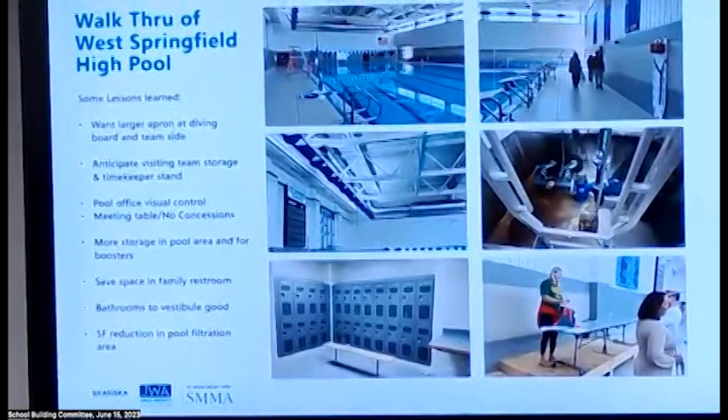So we wanted to respond to some of those things that came through the walkthrough. Specifically, I wanted to show you that we had adjusted the plans based on the site constraints we were talking about last time, as well as some of these commentary items. So what would a larger apron of the diving board and team side look like?

The team side was in order to add an additional seating line for visiting team swimmers, as well as to anticipate the storage and timekeeper stand. The initial storage could be dealt with a few different ways, but we're trying to show a little bit of extra storage, and we keep the timekeeper stand in our goals.

And then what was helpful for us is to understand how critical the pool office's surveilling position is. You can't mess with that. It's got to be able to see the vestibule, see the pool area, and also observe, at least by sound, people coming through from the locker rooms.

There was noted lack of storage for equipment to come out into the pool area, as well as that question about storage, how we would deal with boosters. So it was agreed that we didn't want a full concessions window, but we would want to allow a booster group to put a table out. So maybe that's just about having sufficient space in the storage room for a table that could be pulled out.

There was agreement that the family restroom, which was quite sort of double the capacity you would absolutely need, might have had extra space that we could pull back a little bit in order to make up for it elsewhere. So that's something to look at.

We talked about the vestibule bathroom relationship being important, because in our scheme, it's actually relating to the high school again. So we've tried to show that.

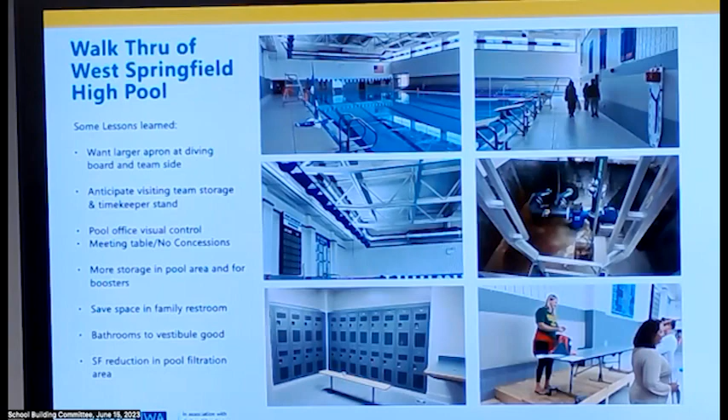And then one question that we're going to talk about today is the square footage for the mechanical systems. There's some choices that could help us squeeze down the mechanical space slightly based on the filtration choices. Mike is going to join us at 3:30, and we've got some slides so he can ask you some questions that will help him develop his specifications that we'll then respond to in the plan.

So, next slide. Again, remember last time we were showing these three potential physical orientations. So we worked with the site team to explore this further.

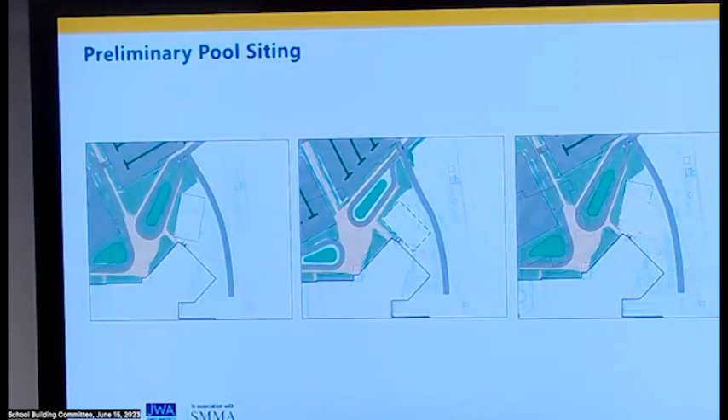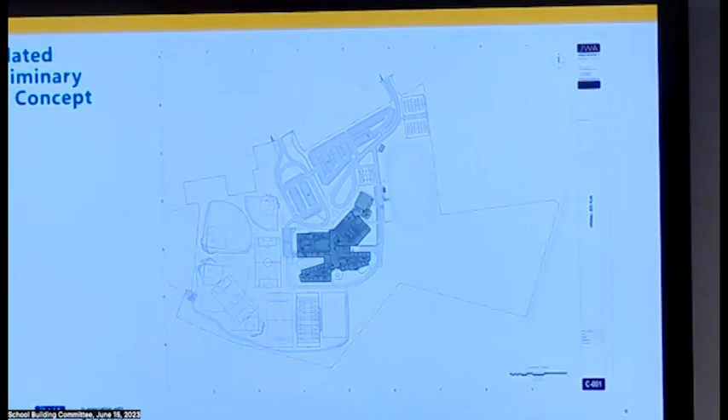And in the next slide, you see where we are currently. So what we ended up doing, and the plan you'll see close up in a second, but in the overall view, we found that if we took it apart there's three programs—there's a pool, there's four programs.

There's the pool, there's the mechanical spaces that support the pool, there's the locker rooms as a component, and then there's those things that you have to pass through, the pool office and those pieces. So rather than have it all as a bar, we actually tried to kind of break it apart a little bit to see if we could make it fit what feels like a really important geometry.

That we're trying to hit here, where the front of the school is not over—the hierarchy. You don't want to have the pool sticking out in front of the school. You want it to kind of feel like the school is the most important element.

But we also have this point that we have parking behind the pool building, and we have this concern that we have people coming from both the backside, potentially from parking, or from the front loop. So we have a double, a vestibule that has to be accessed from both sides.

And then we have the basketball courts. So how do we kind of fit these together? This is our current situation that makes the best use of the site, and we think it answers a lot of those questions. So if you could click forward.

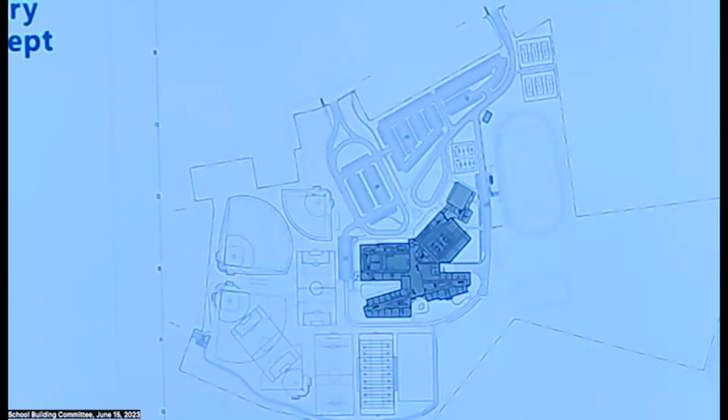So this is a blow-up of what you're seeing there. Not everything is perfected, I think—we would have a strong core, and a really important question that the next committee has to collectively answer is whether this vestibule and the bathrooms, in this configuration, we're assuming they're part of the pool.

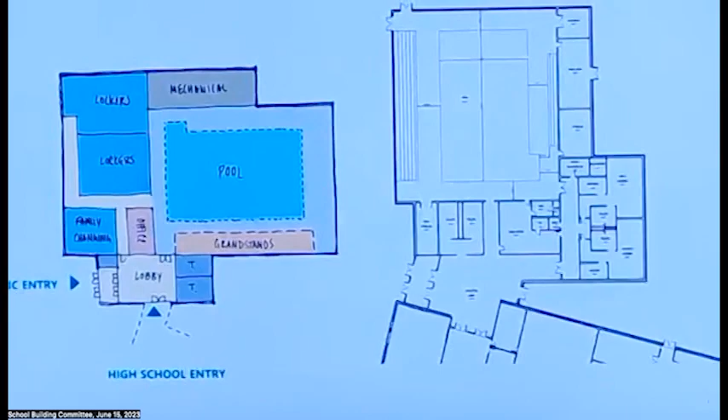So that increases the pool square footage as a building. In order to have that not be added here, because the vestibule is adding obviously a lot of square footage, especially since a vestibule has to be accessed from two different sides.

And it's kind of nice to have this big, generous footprint because it's essentially the overflow from the gym. So if you have 500 to 800 people in a gym, you have the ability for comfortable access from the front of the building in. If you have a bunch of people—parents there for the pool—you have essentially this room between the two that does double duty. So this is showing a very generous lobby, obviously.

And there's mechanical systems to support that, obviously. So it's an expensive piece that in a way wasn't in our minds when we were thinking about the school. So we put it with the pool. That increases the pool area to the combination of these two.

So that puts us up at 17.9—more square footage. What was it before? Well, we had 16, that was about where we were. 15 is the number we had talked about originally, way back before. We were at 16 last time. Again, we haven't gotten into the cost per square foot, but we had a rule there that we were kind of roughing out.

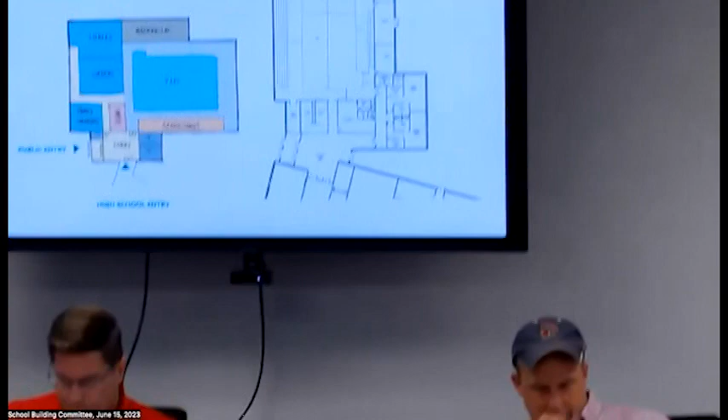Yeah, but we're adding 10% square footage—does that add 10% cost? Exactly, it's directly relative. Right, that's what we're doing. So that's the question we're looking at.

But this is where, looking at it, here you can see a little bit more close up.

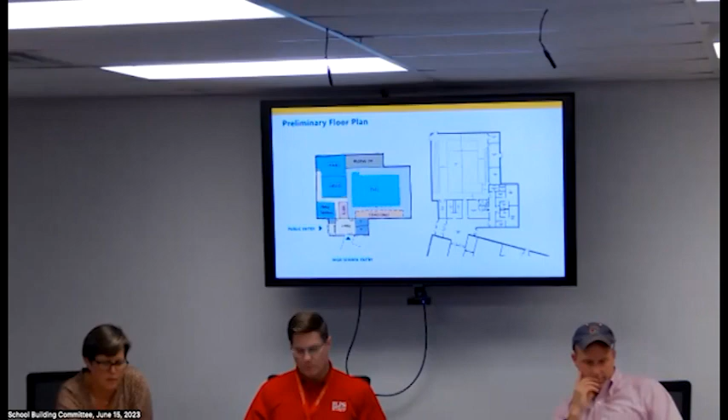What we're talking about is this rearrangement. So we have the pool mechanical room parallel with the deep end of the pool. We're not showing the diving board, but we have a 10-foot apron to the back. 10-foot up front could be bigger than we need, so that's an area where we could go a little tighter, maybe, depending on the flow and preferences.

That's the deep end, Dory. The south end is the deep end. That would be the north end technically, right? North is the deep end, yeah. The top plumbing room is east. Oh, northeast, yeah, north. Let's say plan north.

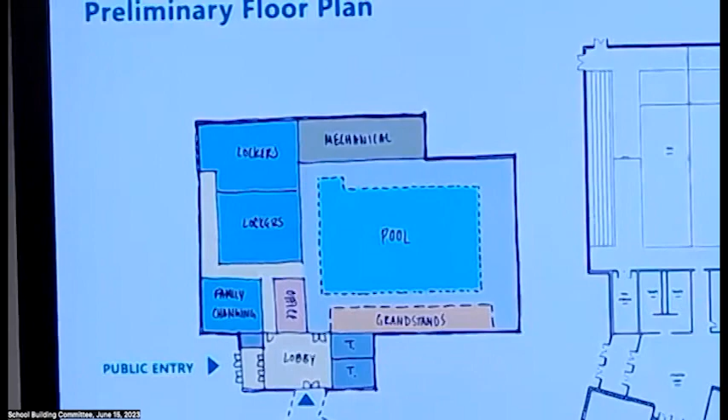Forgive me for asking this because I wasn't at the last meeting - so there's not going to be a basement under this? Correct. Good. But the deep end is as deep as it goes, that's what it sounds like, yeah.

And this is pretty straightforward, right? We did look at whether there's a way to connect a second story, and it just was going to blow it up. So it seemed like the important thing was to address the really functional issues that were raised.

So just looking at it, Dory, the main entrance - I think it should be to the far left, not directly at the end of the pool. Two reasons: that's where the starting blocks will be, or no, the blocks will be at the other end. But there's traffic, foot traffic, and dirty shoes.

So I think that should be where the storage is, that main access. I know there's... all right, well, no. I think that's right, or move the toilets over. Yeah, that's what I mean. Yeah, we can move the toilets over for sure.

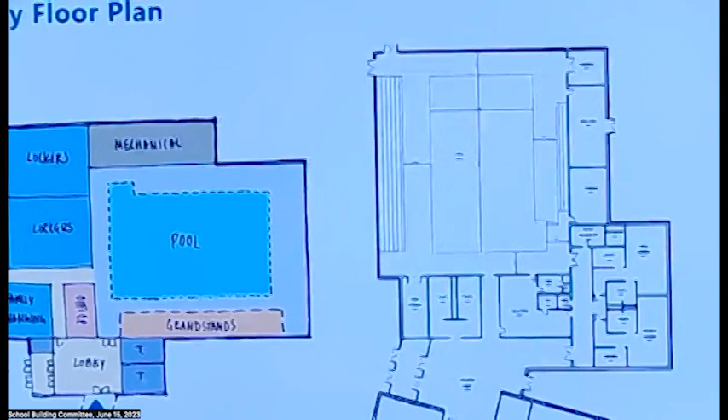If we could - I mean, part of it is that vestibule, right? You need to get through the double vestibule. Yes, we can tweak that, but I think that's really helpful commentary because we want to come in more directly. And I think that's okay.

The pool - you're thinking about sightline, right? So my assumption was that you're coming in and going by the office. Yeah, I get that. And security maybe too. Flip the office with the toilets.

Is that okay? Because again, if the office is to the left, is it okay to just have sightline of people coming out of the locker room into the pool area? So you're talking about moving the pool office and the toilets in the flip-flop lane.

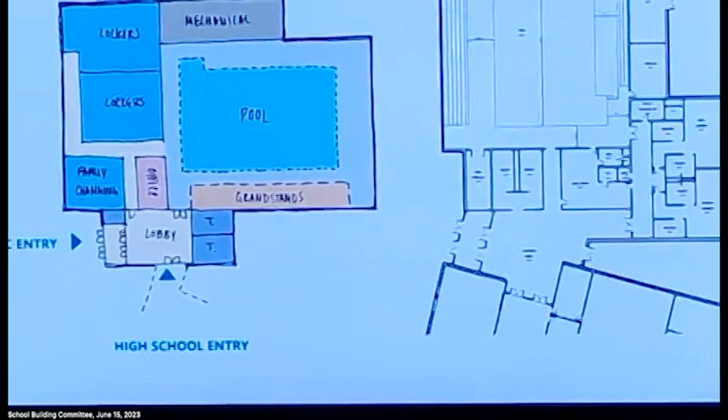Yeah, I think that was fine as long as the pool office opens up both ways. Like if I'm looking at this pool office, and if we're thinking it looks similar a little bit to the one in West Springfield where it kind of opens and closes, is that what you're talking about?

Like how they had that whole thing that opened all the way? Yeah, we're not gonna do the open front, no. We're not gonna open it, but we might have glass. We didn't want quite that big an opening though. You just want a window essentially. Well, yeah, whatever, it doesn't matter, as long as you can open to see out, that's what you're talking about.

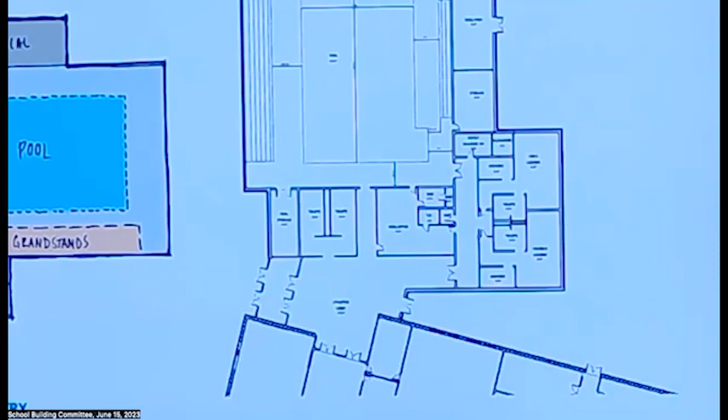As long as you can see from the pool office into the vestibule as well as passing the office. Right, as well as in. Well, so Dory, I think you make the hallway glass and the poolside glass with an opening.

Hallway side for ticket sales or something? West Springfield, they use it when they have rec meets - they open that whole thing up and use the office as their snack bar. But we're just gonna put a table in the hallway for a snack bar, so we don't need the whole garage door thing, right? But if you're gonna have people signing in and checking in, you're gonna need some way - like if they're paying or scanning - so you need a barcode or something, yeah.

Greg, what was your question about the path of travel? So the main hallway is in the middle. So when spectators are coming in out of the snow, they're gonna walk right at the end of the pool. I think it's better to put the spectators right into the stands and not across the pool deck. The swimmers are gonna be clean anyway, because they're out of the locker room.

Got it. Yeah. And just avoiding the diving blocks location. The blocks are gonna be in the deep end, right, in the other end? Right. But, and I know I said that before, but it always gets wet. Is that what you're saying? What's that? Pool storage becomes your hallway in? Well, we're gonna have a problem with that because of the double vestibule.

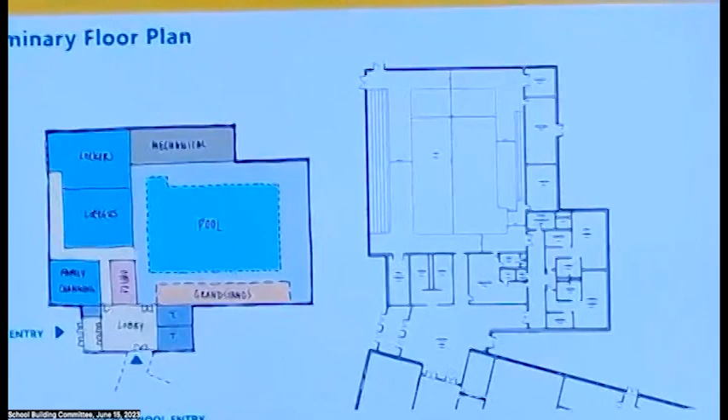I think we might be able to keep the storage and put the office next. Just not dump it right out there. I was thinking that we would have the passage, then the office, and then the toilets. So you'd still be able to get to the left side of the pool on your way in, but keep storage there, because the value of storage is that it helps our vestibule a little bit, gives us that padding.

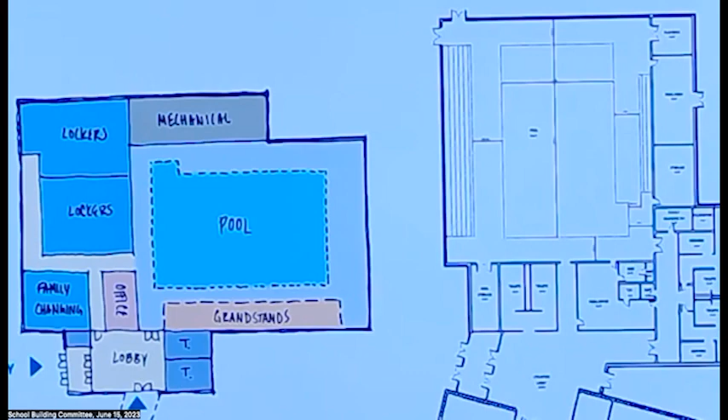Or is the size of the lobby driven by the geometry of the building and the pool building? Yeah, pretty much. In that you have to get people into the locker room. And the other thing, if I could flip back the slide here, sorry. One thing that was really bothering me before is that we had this kind of tight chute between the pool and the school. It felt awkward.

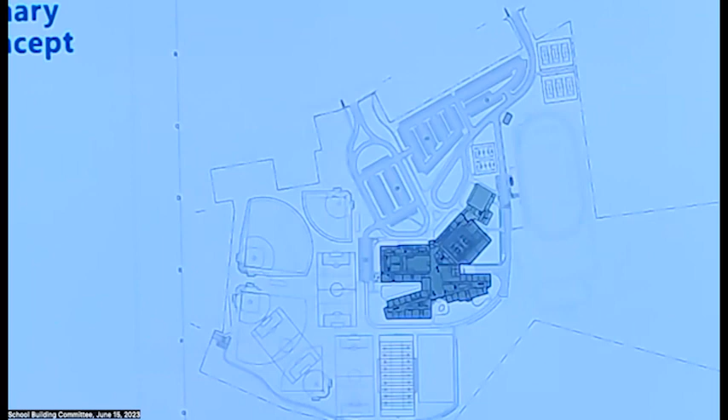Using that storage area to kind of open that opening makes it a little bit more pleasant. And also, what's nice about this is the mass of the pool becomes a big piece that you're seeing rather than the little tiny mechanical systems on top of the little tiny roof. So that'll be nicer too. Yeah. But we can work on that. I wouldn't sweat it. Keep giving input and we'll play with it.

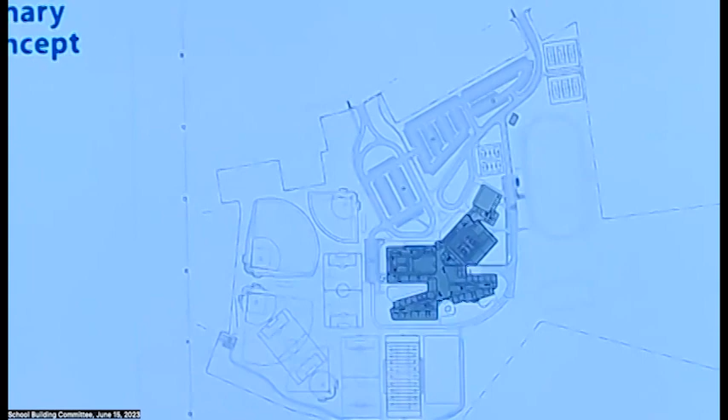I think a question is, where does the pool office really need to be? It seems like the pool office needs to be looking at many things, right? Into the pool itself. Having a connection to the main vestibule. And is there a supervisory need to be able to connect directly to the locker?

I mean, if you move the pool office to kind of where the toilets are, or if you put the hallway where that first bank of toilets are, then, right, I think that's what Greg is saying, make a pathway into the pool right as you come in, a little more direct, instead of walking all the way around.

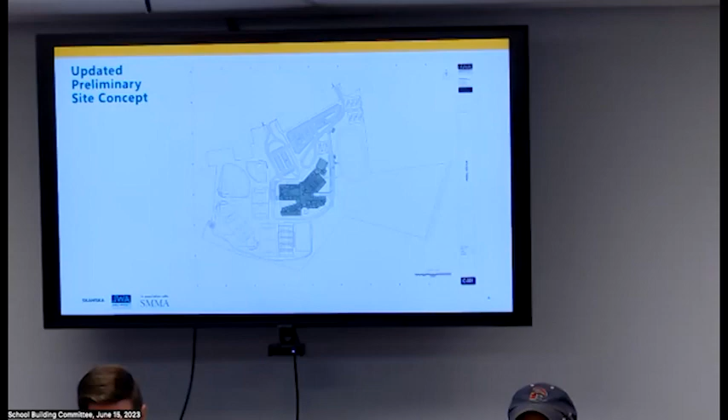If you have the pool office shifted to the left a little bit, you're gonna be able to see people coming in both doors, and you're still gonna be able to see people walking towards the locker room, which they don't have at West Springfield, and that they did not like. He said for their rec teams or other events, they have to have people out in the hallway collecting stuff, because kids run around to the bathrooms and you can't see it from the office.

But here you would be able to see all those entry points from both sides and into the locker. And from the athletics connection to the high school if you were coming in from that way. Right. So getting that properly located is a key. Okay. So Dory, the 15-7-11, is that this entire thing absent the lobby? Yes.

Can we also make the locker rooms accessible from outside in case we have multiple teams on the field that we want to use those for? Or does that not fit in? Well, they would still come through the gym though. The danger of that I would see, Greg, is just from the sanitation level. The value of having them come through the vestibule, the foot scraping process.

Okay, that makes sense. I would say now I show significantly more storage here. There's a full storage room on the left, 318, that's bigger than what you had at West Springfield. And there wasn't that 419. So the other option is if this feels like more storage than we need, we rearrange down here, but leave that one storage up there, 419.

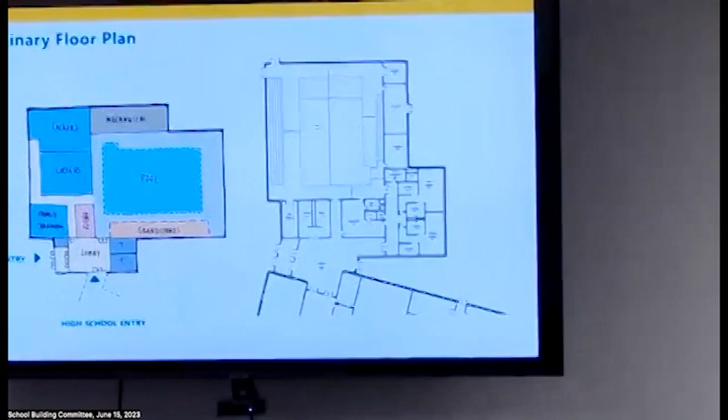Is there any way to make those benches open up and keep storage in? Because that's kind of what we have now. We have all these benches along the pool and they open up and we keep fins and kickboards and a lot of pool equipment right there that's super easily accessible for all the teams that are using them, so you don't have to wheel things in and out.

So my thinking was that the far side might be standard aluminum bleachers, but that side we would be doing more of a structured thing, or at least the first level of it. Okay. You want to be really thoughtful about the pool equipment storage. What we have today is not ideal. It's functional, but what you want is air to get in through stuff so that mold doesn't grow and everything like that. There's other ways to do on-pool storage for kickboards and stuff.

Will all the chemical storage be stored in the pool mechanical room? Is that the plan? There was a lot of storage back there. That's why it's quite large. And this is where the decisions that we'll make with Mike will help us size that further. I think it's somewhat generous, and that's where I didn't know if we want to keep these 2 separate storage rooms, so that if there is a need for pool equipment and chemicals outside of that.

And also thinking about the possibility of, again, boosters and a table, where would that fall in? I'd rather not. You can see the configuration of this lobby makes it pretty tough to have an additional nook or a closet. Based on this change, we might be able to reduce the pool office size but get a second closet into the vestibule if we like, because possibly the electrical rooms will want to stay over here next to the locker rooms.

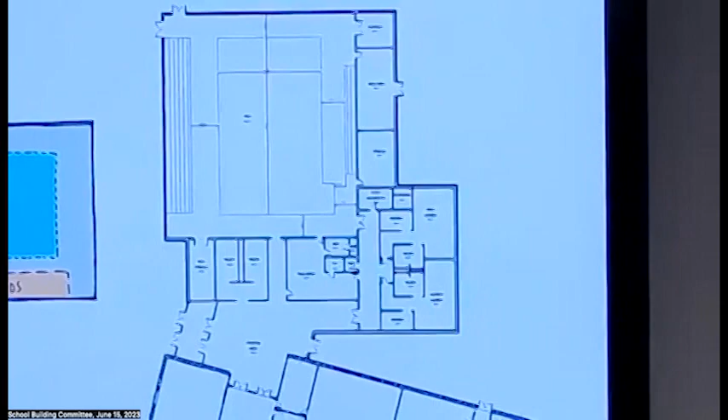What does the TD stand for in the pool? That's the communications room, where he had the speakers and all that stuff. Okay. There'll be some kind of seating in the lobby, whether fixed or otherwise? There's room for it; it's a question of how much you want there relative to the traffic flow, but benches for sure are pleasant. I'm just thinking of waiting parents. Everybody wants a place to sit down and do whatever they're doing.

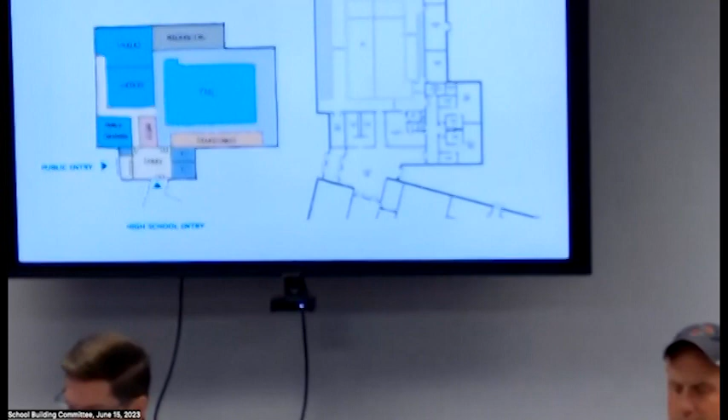When it opens up from the vestibule into the high school, because we can't see all the high school plans, how far is it from those doors to get into the actual gym? Let's see if you can see it. From that set of doors, you're about 8 feet further to the gym line. So we have that double door. I have to switch to the other PowerPoint. I knew this was gonna get irritating. Go back to that bigger one, Gordon. Yeah, there you go.

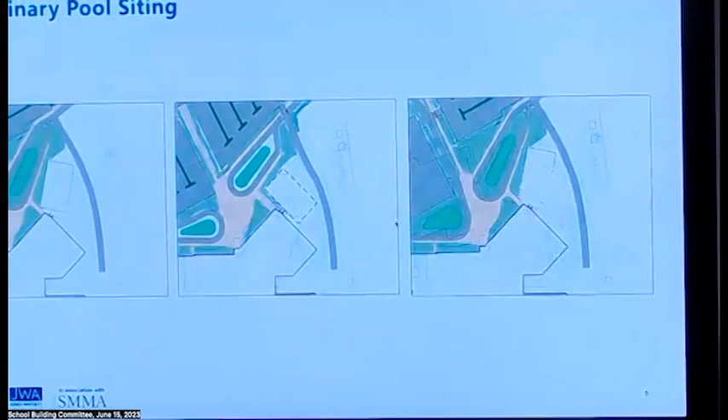You can see there's a gray corner. So we have the gym, those double doors: one of them goes straight into the gym, essentially there's a space and then another door to the gym. The other goes down the hallway. So we have about a 10-foot hallway and a 10-foot area that's the first wall of the gym. So you have two offices there and a door into the alt PE room, so all of that is available. And the alt PE room being on this side seems super helpful to the pool program, because of overflow and big needs.

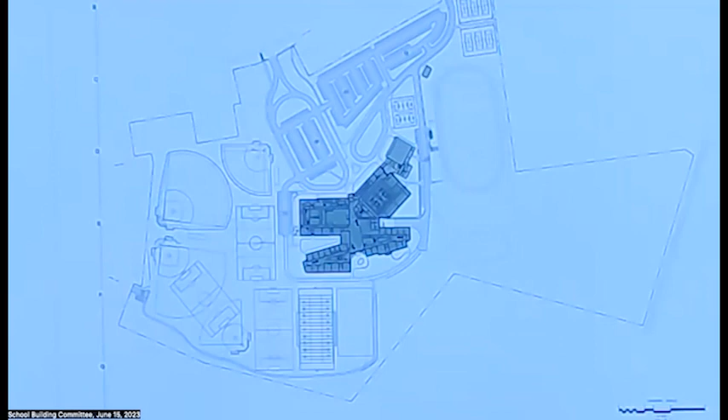So my thing is, we don't have really big needs right now because our pool is so small, but every year there are a lot of USA teams that cannot find pool space that are always looking to rent space and have swim meets. There's also championship meets, and we can't ever find places to host championship meets, and you can essentially set the price for what you want it to be for the weekend and make lots of money doing it.

So that suggests to me that you guys are comfortable with the size of the pool. Is that the general impression I'm getting? I wanted to get your temperature on this. So this is a 6-lane, 75-yard pool, and how wide are the lanes? A little 25-yard, not 75. Oh, yeah, sorry. 25 yards, okay.

Sorry to interrupt, but whoever's controlling the Zoom, Victoria Clifford is on and was hoping to be moved to a panelist so that she would also have the ability to be off mute. And can you also invite Michael Manzini? Yeah, they're both on. I'm sorry. Oh, there's Michael. So that's great. And move John Benzinger, actually, all the attendees.

There we are, okay, 17,909. If that's not feeling scary yet, if that's feeling good. No, it's scary. We're getting bigger. I'm all about the square footage, but I don't want to go over; the 15 is already mind blowing, to go to 16. I'm not loving it. 16 million. Well, let's get the parts and pieces right and where they are, because there's the ability to squeeze, and the toilets, potentially. We'll obviously always look for ways, but I was trying to accommodate those requests. If you prefer we not and just stay tighter, then we can do that.

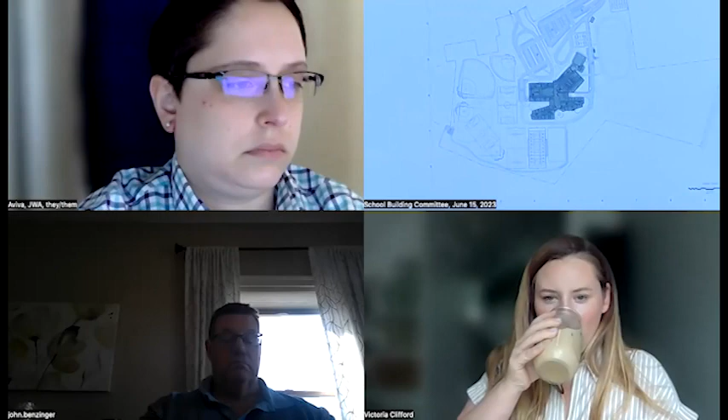So I look at that lobby as a really good access point for somebody coming in for a basketball game. So I agree. I think there's a pretty good argument to put it into the overall school, right? And that's it. You're looking to save 2,200 square feet. Yeah, but you're not saving, right? It's not saving, but putting it into that, the advantage is the price tag on the pool. And so that's just to play that out.

So your feeling is it's better because that's gonna be a lobby not only for the pool, but for all. Sure. So those could be ticket sales coming in, like 2,100 square feet of ticket sales to get into the basketball game too. Right. And there's gonna be boosters, there's gonna be hot dog stands. Yeah, for sure. It serves both, basketball too, right?

The question is politically, is a more expensive pool or less expensive pool, or more expensive school or less expensive school going to help your vote? I think is that what you're saying. Now, we're saying that from a clarity to the MSBA, we're not going to like the vestibule in the school. Could we work on that? I guess we could. It's clearly obviously a vestibule for the pool, so you know how it's been thus far.

But I'm still trying to understand, everything we've heard in this project so far has been that the town really wants this pool. So I'm wondering. So Birchland Park, when we built it, passed by 12 votes. Uh-huh. Pool is the secondary vote. I think we can agree the school will get more votes than the pool. Is that fair? Does everybody believe that? I don't know. I don't know.

I don't know that people are gonna go in and vote yes on a pool and no on the school. They're just not gonna do it. Why would you do that? So you're either gonna go vote for both or you're gonna just vote for the school, I think. And it's an easy one to not vote for. I think we need to keep the price tag as low as possible in order to encourage votes.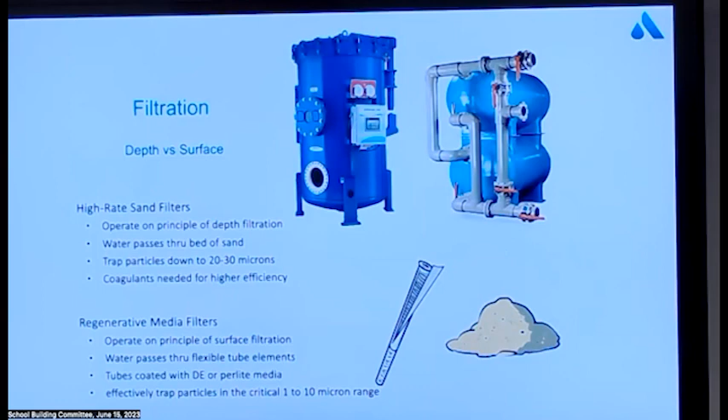Now this is a renovation, so now they have this giant pump room that they don't need all that space for. For a new construction like this job, we can work with the architects to make a much smaller sized mechanical room with a regen filter. I mean, you're talking over $300 a square foot for mechanical room space. So when you can bring that down quite a bit, it's going to save a lot of money, because we're going to be able to work with the architect to provide a much smaller pump room.

It's a smaller operating weight. It's easier to install. It's just a much better filter at the end of the day. You just have to be okay with paying twice as much capital cost up front, but the return on investment of a full year-round pool is probably like 7 to 10 years by the time all the water costs, electric costs, space costs, chemical costs, all those savings are combined. You've got about 7 years before the filters essentially pay for themselves. It's just a much better option.

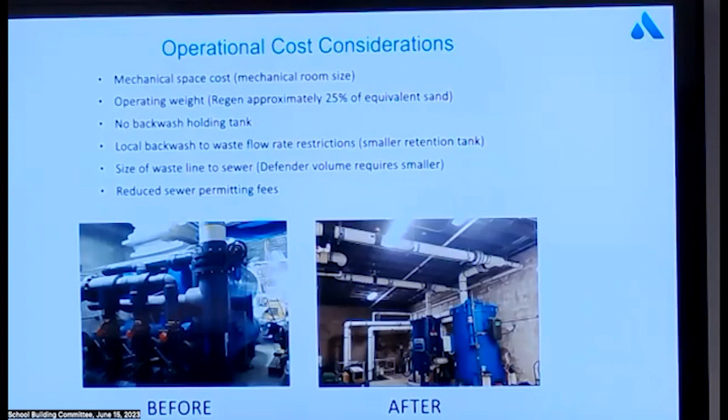And then there are a couple good regen manufacturers out there. Neptune Benson is one, Aquity is another, Paddock is another good one. The only one doing them in fiberglass though is a company called Aquity, and it's a better choice. They're a much cheaper upfront cost. Neptune Benson is the leading regen filter manufacturer in the country, but they only make steel vessels.

The newer companies are starting to make regen filters in fiberglass, because they're lightweight, they're shorter to install, they're corrosion proof, lower maintenance. And you don't need to bond them, and contractors find them a lot easier to get in and out of the room during construction. And you'll never have to deal with corrosion or any of that.

So the big choice when it comes to filters, at the end of the day, you have to choose: do I want sand filters or do I want regen filters? And for a pool this size, you're going to look at either one regen filter or potentially at least a pair of sand filters.

You're not going to be able to do one and one. You're probably going to need 2 sand filters or 1 regen filter. So just right there, you're looking at a much smaller footprint, and I know that's a big deal for this project. And you get better water quality and lower operational costs. You just got to be able to digest the fact that you're paying twice as much.

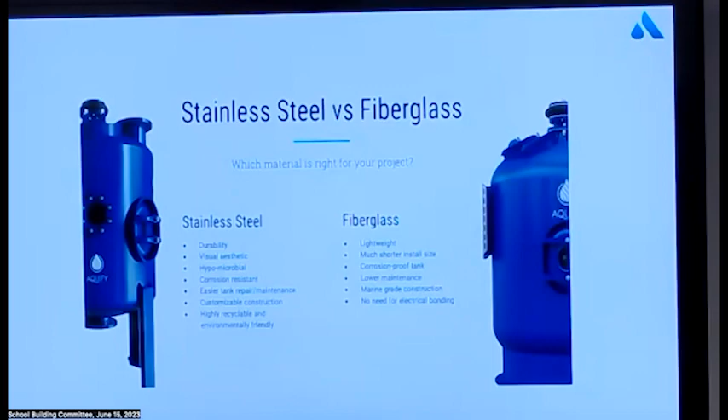Mike, do you want to stop and get some reaction to that? See if anybody has a question. Yeah, go ahead. What's the shelf life difference between the regen versus the sand?

We could take a closer look at warranties at another time, but you're looking at 10-year warranties on both. We've had Defenders and regen filters like Aquity installed 10, 15 years ago and still operating perfectly today. Same thing with sand filters. There's really not a major difference between one or the other in terms of replacement after they're installed.

It's the only difference is with sand filters, you have to have a company come and take the sand out of the filter periodically because that's a permanent media bed. A sand filter is filled with sand and that sand can't stay in there forever, and it weighs thousands of pounds combined. After several years of operation, maybe 5 years, that sand is filthy and needs to be sucked out by a sucker truck, removed and replaced with new sand. That's a big cost and it's a lot of labor, and you need a special company to be able to do that.

With regen filters, the media is replaced more routinely. It's a very lightweight media. It gets vacuumed out—we've had 19-year-old lifeguards do it. It's not a complicated process. So you have to buy media throughout the life of a regen filter. They're maybe $25 a bag, and you're doing it monthly. But with sand filters, you have to do one change every 5 years, but it's a monster project when you do. That's really the main difference in terms of life cycle.